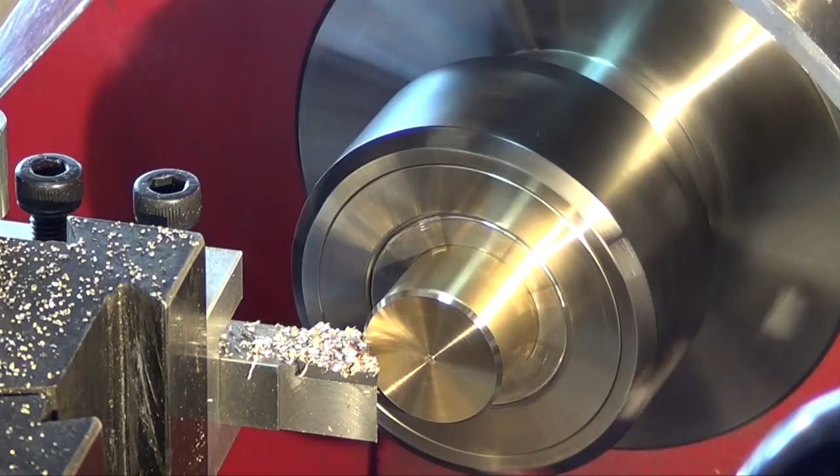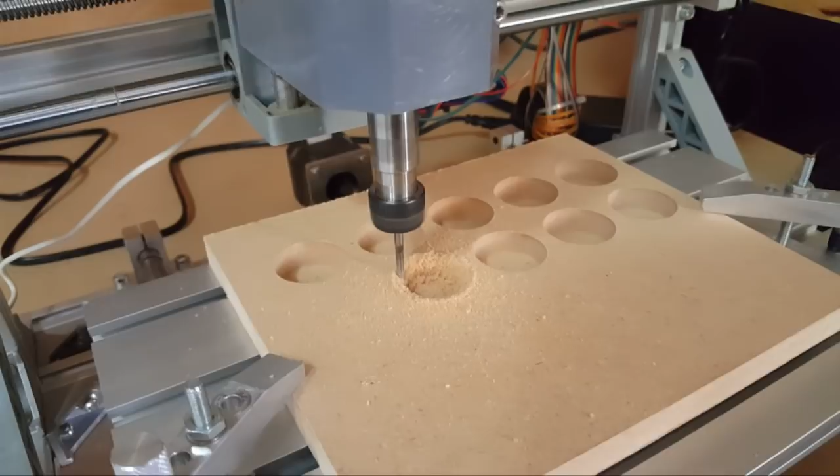Okay, part 3 and the last part probably for the 3D printer. I'm really surprised there's not that many views, so I'm assuming there's not that much interest in a 3D printer. And I can probably see why. Everybody's way ahead of me. Everybody probably got into it years ago, but I'm just scratching the surface of it. I'm having a blast here.

Making a bunch of different things for it. There's also software I'm seeing out there where you can take pictures of a 3D object and throw it at this software and it'll reproduce and model it for you, which is cool.

But I've got the A6, and the A6 was $210, Banggood. The A8 is $149, $150. The only difference is mine uses a knob to select menu items on the screen on the printer. The A8 uses buttons, but you'll see here in the software it doesn't matter because you're going to use software to talk to it anyway.

So first thing, I just want to share a couple of pictures from some subscribers. And then, I'll get into the software and then I'll actually show some of the things that I've done to the printer to try to improve print quality. And I'm getting really good results now. So hope you guys enjoy.

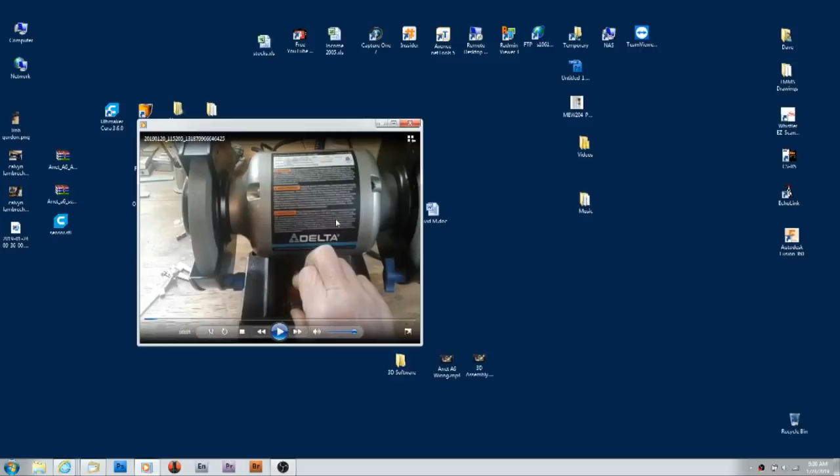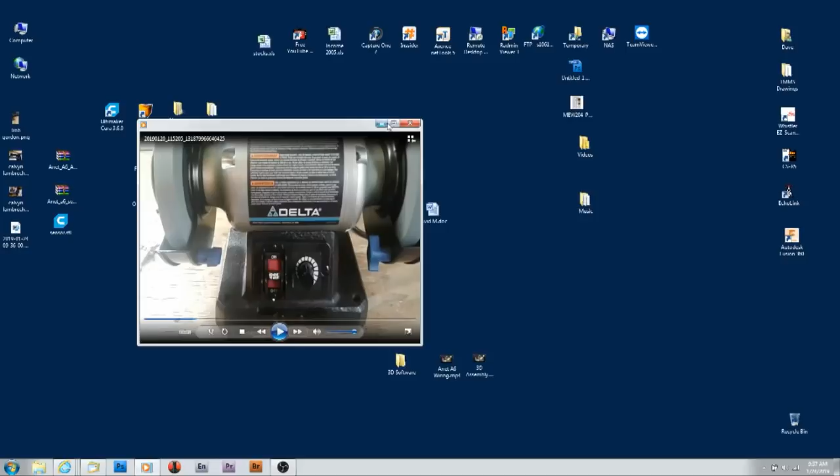But this is one video. I'm working with this guy right now. He bought the Delta because of my video on it, and yeah, there's noise, but he shot a video showing it and I can see the wheels wobbling and things like that. A lot of times I can steer people to other people who can help because I know quite a few, not to brag, but for this, he wants to do woodworking, and I forgot to tell him, you should look up this guy Jimmy Porter at Stewart Arts, because he does woodworking, and I'm pretty sure he bought a Delta also because of my video review on it. So look him up, I don't know if he's got a video right offhand. I'm not going to spend the time to search, but get a hold of him and see what he has to say. We're going back and forth right now over this Delta noise issue.

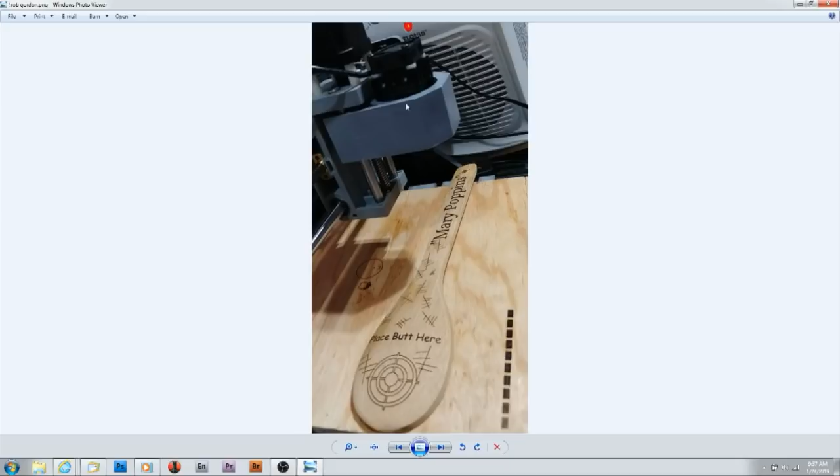Some of the other stuff is really hilarious. This is Rob Gordon's picture. When I first did the review on the CNC, I thought this was hilarious. He obviously has kids, place butt here. So we went back and forth, and he actually sent a link to upgrading your CNC, and I think this is rather out of control. But it's a kick, this is actually a different unit here. Yeah, see, it's got, no it doesn't, mine has that support, let me look, yeah mine has the same support. But upgrading this so it can do aluminum, I don't think so. There's just not enough rigidity. I tried everything under the sun. I had people actually leave comments, have you tried it on aluminum? It's like, well, you can engrave aluminum and steel, but no way. I've even tried taking a thousandth cut and you just cannot do it. So I thought that was funny.

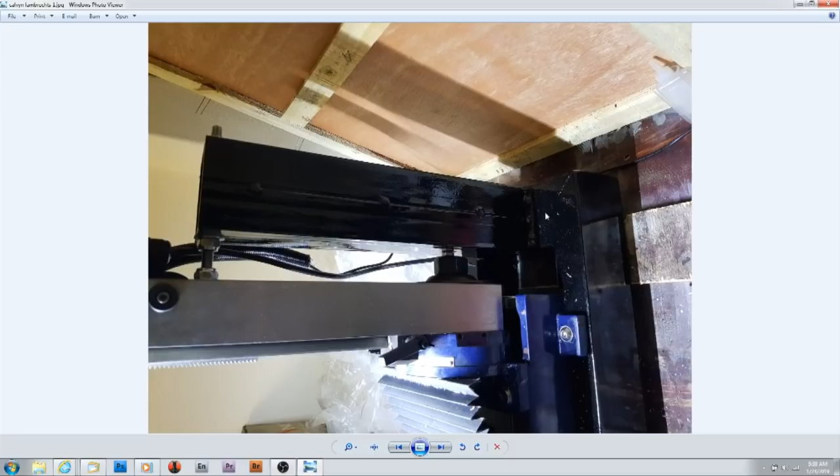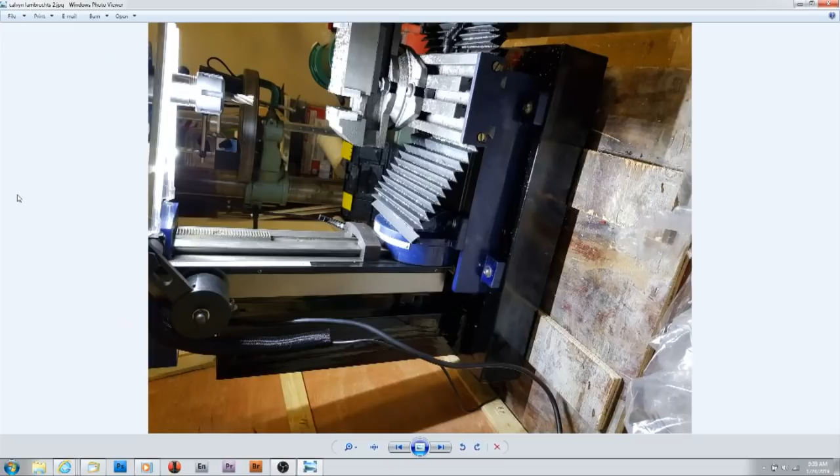And then this is another guy, Calvin, and a lot of times I like seeing the pictures, but he emailed me worried about flexing of the column. This guy's in South Africa, and he sent this picture in, and I'm going, holy moly. That definitely gets rid of flex, and you can adjust the tilt too by doing this. But I do like seeing the entire picture for different reasons. I'm looking at this, seeing this swivel base on the vise, and everybody that's had the swivel has had finish issues. You just can't do it, you get rid of it. I even got rid of it on mine. I bought the vise with the swivel base, saw a mess, got rid of the base, and lo and behold, I guess I can turn this picture, lo and behold, the finish is completely changed.

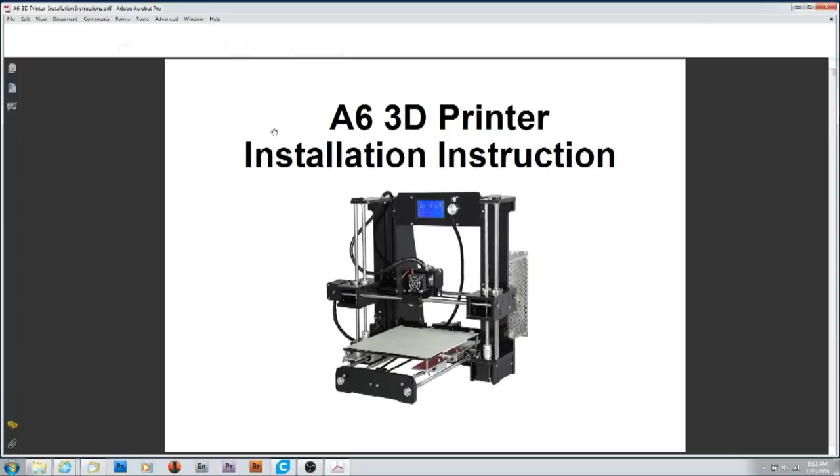But I figured, all right, so I've got FreeCAD, yay, and I'm sure you can use Autodesk Fusion 360 to model your part. But I went into their installation instructions and opened up the PDF, and yeah, it's all kinds of nice pictures, but where's the part here?

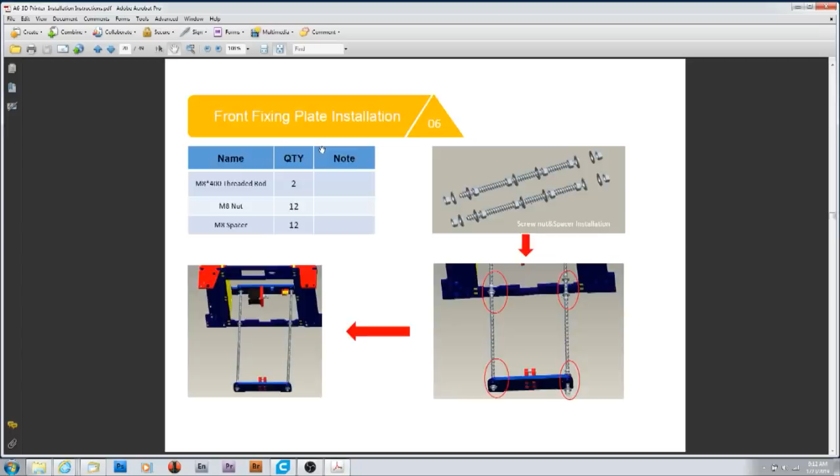Software - so I was looking for something. Did I click on the wrong file? Yep, sure did. Alright, so operation - yep, this is it, I think.

And they say they want you to download and install version 14.07. And I'm looking at this going, they go up to version 15.04.6 or whatever - why am I downloading, or why do they want me to install an older version? Whatever, that version was on the card, so I did install it.

And then they tell you, in pretty good detail, what to click on during the install, what to select - choose custom as far as the printer, and the numbers to enter in for the A6, and so on.

So okay, I install the thing and I run it, and I'm looking at it, and I don't see a lot of controls to it, but whatever. So I'm looking on YouTube at other videos of it, and they're running this Ultimaker with all the controls in there - settings where you can set up quality, speeds, temperatures, and so on.

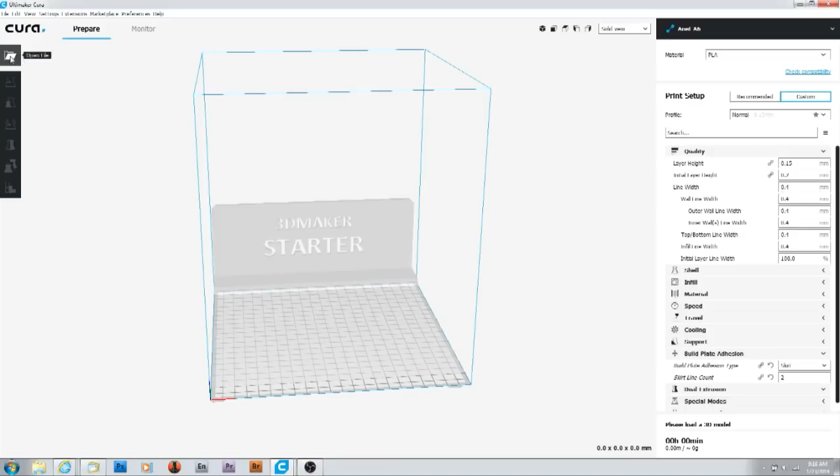There it goes. But all you do is you say open, and you'll find your STL file. And this was one that I had downloaded from Thingiverse. Hold down the mouse wheel and you can move things around, roll the mouse wheel and you can zoom in on it.

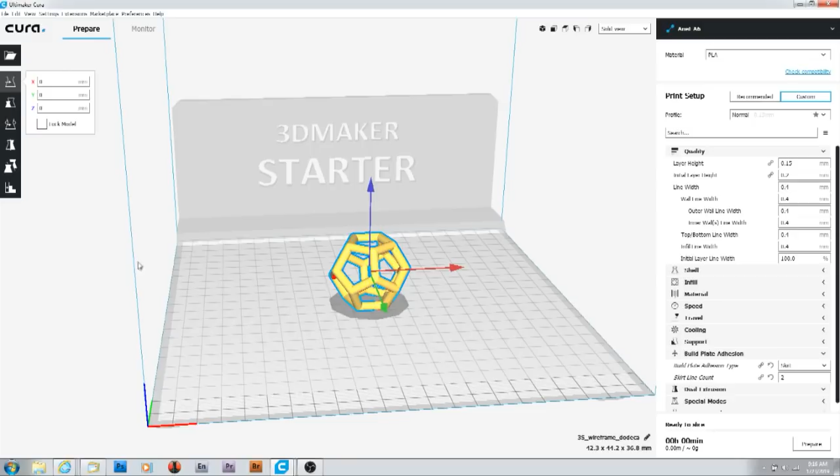You can select your model, and you've got all kinds of controls over here to flip it, invert it, resize it, bigger, smaller, whatever you want to do. The best thing I like about this is if you hover over one particular item, a pop-up really describes in

detail what this item is. Layer height, it's the height of the layer in millimeters, blah, blah, blah. So everything is, as how I describe it, great help menus, great assists. So all the settings are here, which is great.

You can easily import any STL file that you make in FreeCAD, Fusion 360, or you download. For preferences, I did have to go and add the printer.

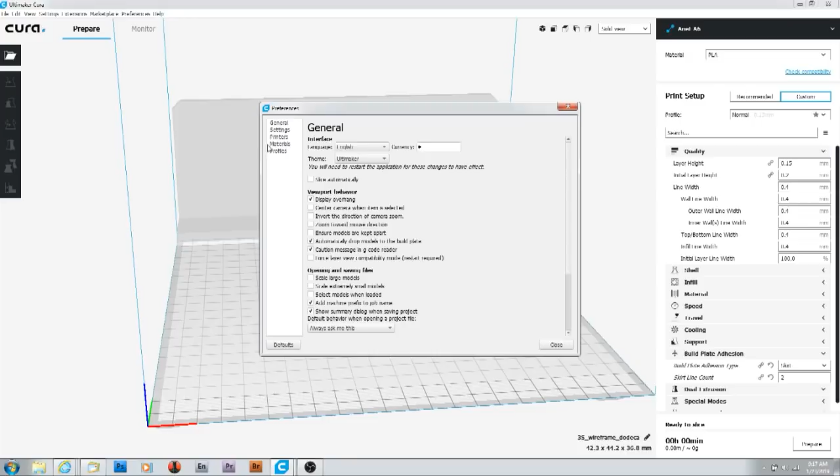Now, the printer A6 did not exist, so I added it as a 3D Maker Starter number, or it wasn't number 2 — this was left over from messing around. And then I went into the settings for this guy and modified it.

Again, I'm not going to go into all of these numbers unless somebody emails me specifically. I did do a lot of research on the internet to figure out specifically what should be in here for the A6 — starting G code, ending G code, everything that should be in there.

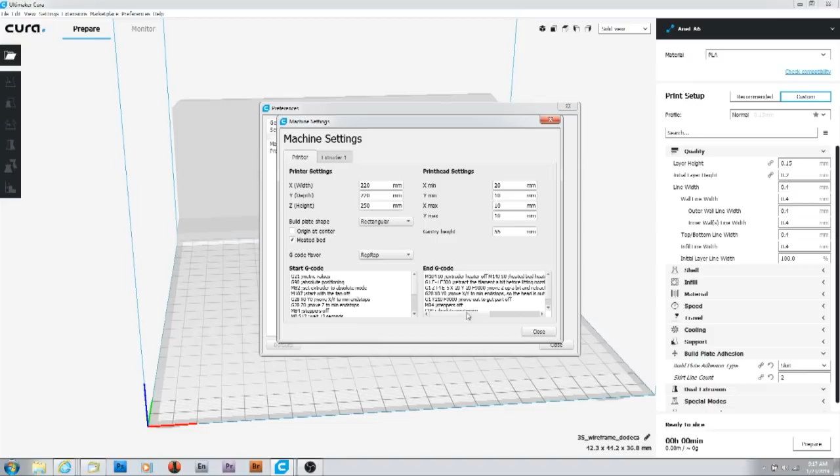And even though I renamed it as an A6, you can still see here it says the 3D Maker Starter, but small bug, whatever. But you can go over to monitor, and there it is — I've got full control over the motors and distances.

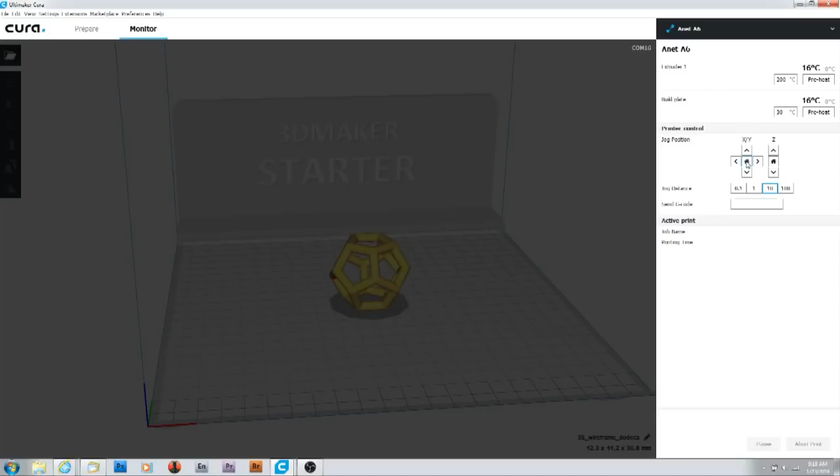So I can move up, down, left, right. I can hit the center and home the XY axis. Hit center, home the Z axis.

So once your model is here, all you do is hit prepare, and I'll click on it, and you can see the slicing is taking effect. So it's slicing this whole thing up into layers, generating all the G code. And from the pull down here, I can say print either to a file or directly via USB to the printer. I'll show here in a second this particular item being printed using this program.

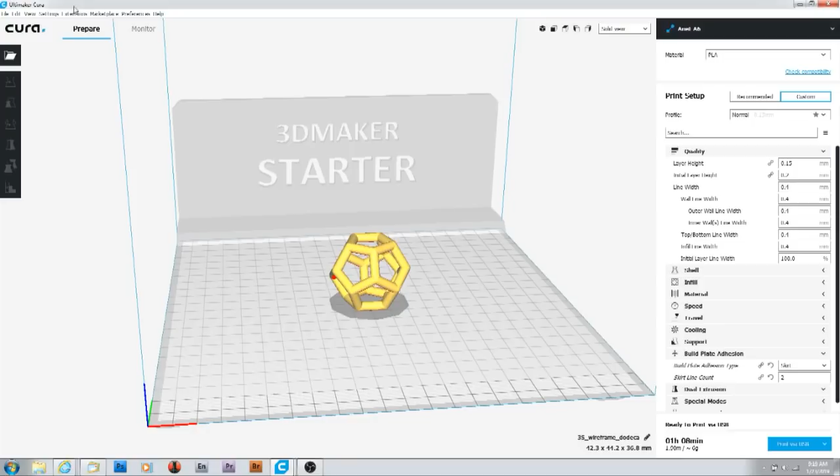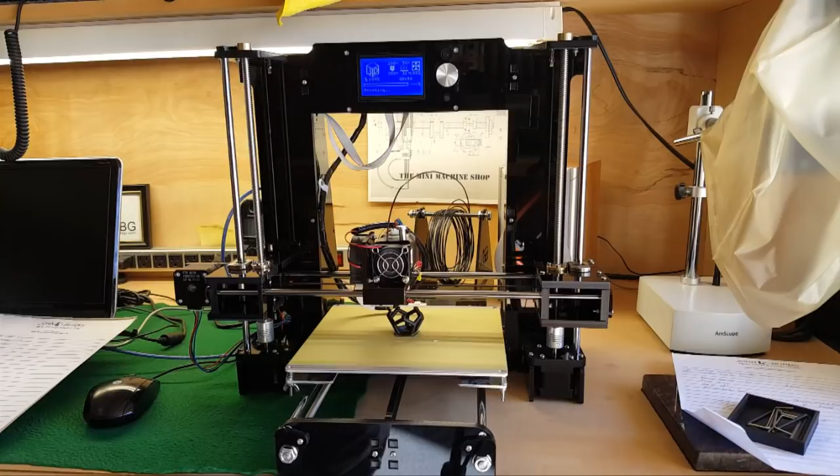Very easy to use once you get the right one. It doesn't say up here which one it is, but I'm running Ultimaker Cura 3.6.0. I just want to point out a few things that I did here to improve print quality, and it looks like it significantly did.

First thing was I was watching a video saying that you got to do maintenance down in here, and George Chambers was nice enough to send me a link to Thingiverse because he saw the pain I went through removing this fan and so on, for this thing you can download to print a magnetic removable part. It makes it easier for maintenance.

But in any case, I did take it apart, and sure enough, there was a lot of junk already in there, especially on the little gear that advances the filament. Let me pull more filament out here.

But in the picture too, I saw this little knob thingy that was printed out, 3D printed. I didn't want to play around with 3D printing the knob and threads and so on, so I just made it out of aluminum real quick. It didn't come out exactly the way I'd like it to look, but it works nicely, so for now that's good enough.

So yeah, in the process, while I had it apart, I realized the bottom block that the stepper mounts on was tilted this way, so the motor was jamming into the wires down here. I had to loosen up the nut for the extruder and straighten all that out, and now everything's back together and nice and straight. Looks like it's working just fine — this thing's starting to crank through some filament in here.